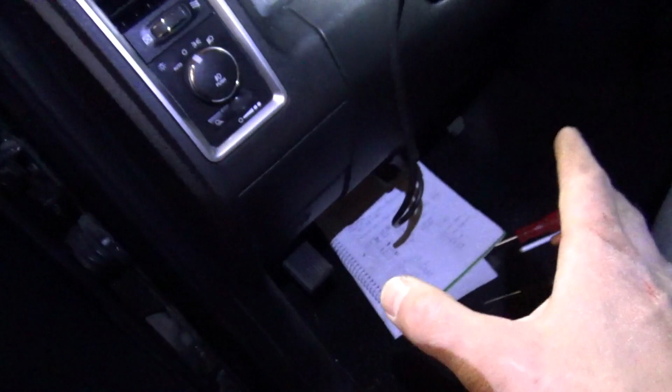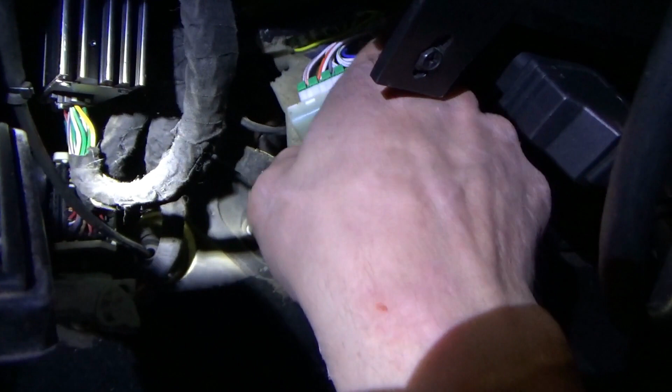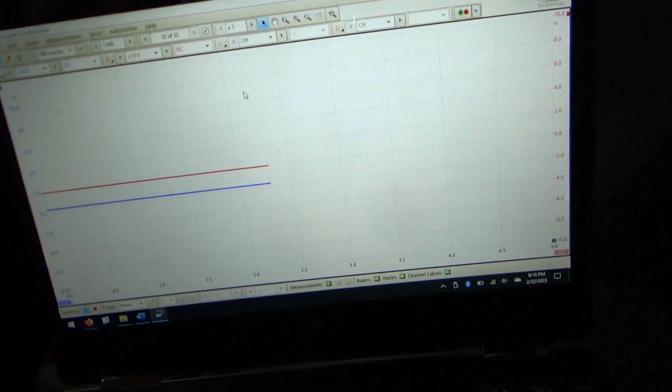Let's see what happens when we plug in that HVAC. I'm just curious. Wow. Everything's lit up. Cluster. 3.2 amps. Insane. HVAC just woke up the entire car.

Okay. Let's unplug it again. Make sure we're dealing with the right module here. Okay. Let's see if everything goes to sleep. Look at that. Everything just went to sleep. Cluster went to sleep. Let's see what the final draw is. Meanwhile, I'm going to look up which fuse feeds the HVAC. And we'll try disabling power instead of just disconnecting it from the network.

So this might take a few minutes, but again, the data logger logged everything. Look at that. Boop, boop, boop, boop, boop. And then right here is where I just woke it back up. That is super cool to have that log. Now it's 0.3. We'll see how fast it decays.

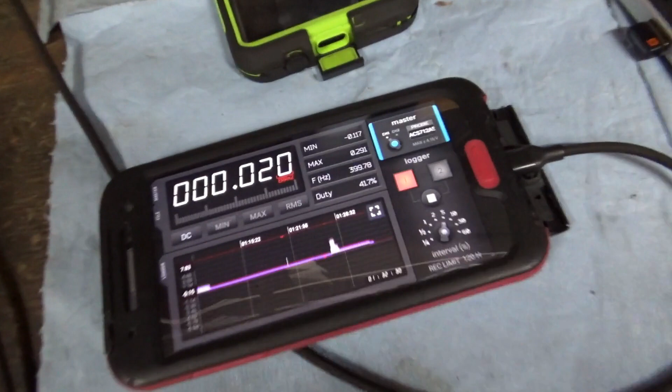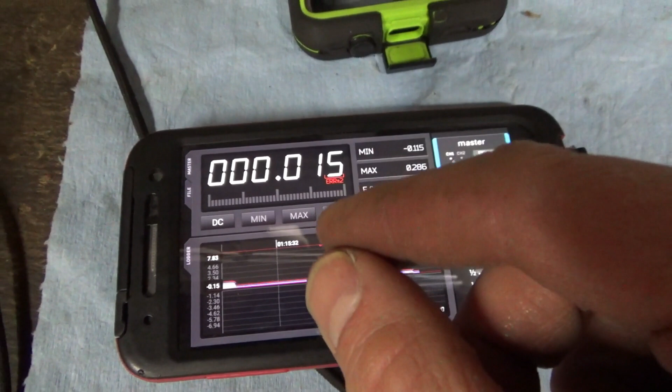Alright, here we are. Proof is in the pudding. We're back down to that 30 to 20 milliamps. That's the HVAC module drawing that and trying to wake up the network. But we have it disconnected at the star connector. So our draw is basically gone. Now, last step, I want to find the fuse, the constant battery fuse to the HVAC. Pull that out and see what the final draw is on this vehicle.

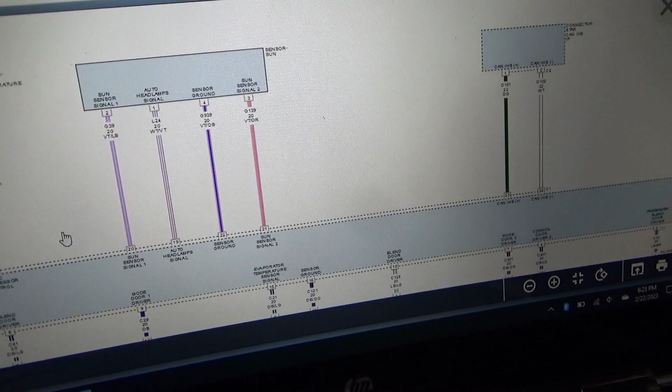Alright, here we go. Here's the wiring diagram for module AC heater. That's our automatic climate control. And sure enough, we have a constant battery fuse. Fuse 84, 15 amp, fused battery positive. Let's go there now to the power distribution center. Well, there's a 15 amp fuse, fuse 84, 0.2 millivolts. I'm going to pull it, see what happens.

Alright, here we go. Pulling that fuse. Let's see if the tea kettle sound went away. It is still there. And our draw is now 100 milliamps. So perhaps that's the wrong fuse. Let's do a little more research on the wiring diagrams.

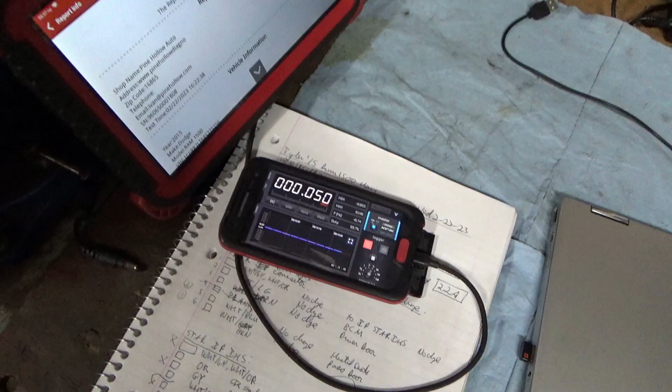One more thing to keep in mind is the breakout box actually draws 50 milliamps. I wish it didn't because it's so convenient to plug in. I wish the LEDs weren't there. Not helpful. That's why sometimes you just got to probe the wires instead of using a breakout box. So right now we have 50 milliamps with all the fuses in. I put the ICS fuse back in.

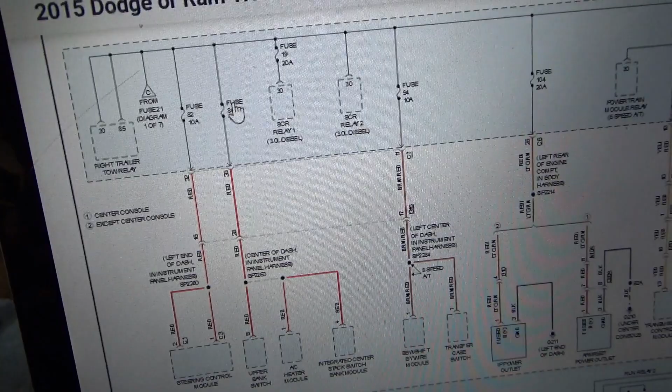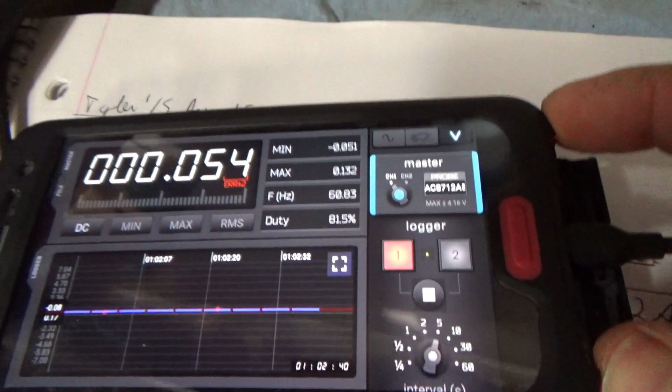Let's see what actually controls the HVAC module, because the wiring diagram was kind of misleading. Okay, so 50 milliamps. I expect one module is awake. That's going to be the HVAC. Now, the discrepancy in fuse 84, I looked up the redrawn diagram, and it feeds upper bank switch, AC heater module, and integrated center stack switch bank module. So let's measure the voltage drop on that fuse one more time. Look at our draw. Take the fuse out and see what the draw drops to.

You see it was 90 milliamps, 50 milliamps. Okay, that's a classic module doing its thing when it's not supposed to. So fuse 84. With the meter. Right there. Consistent 0.1 millivolts. I'm going to pull it out again. I'm going to see what happens to our draw. It's got to be the HVAC.

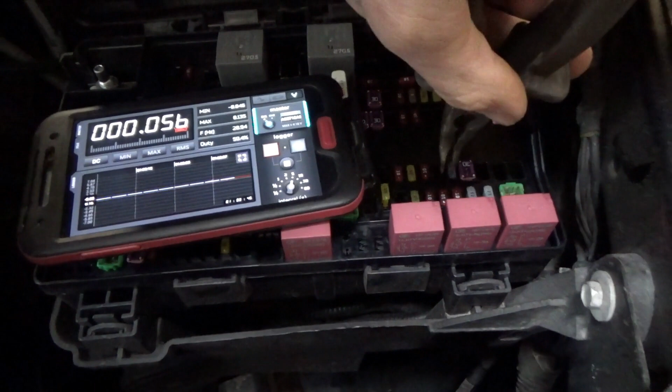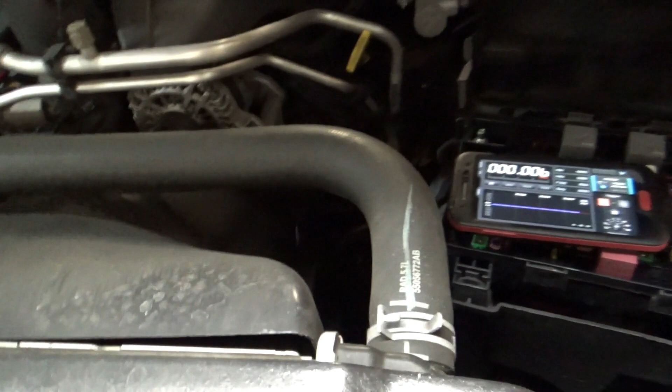Ready? There we go. 6 milliamps confirmed. HVAC module is staying awake. So for me, that's the end of the diagnosis. What do we do next? Look up a new HVAC module.

Now you might say maybe that sun load sensor or the recirc door might have something to do with it. Nope. Those codes actually might be set because the module's bad. And we check the door, you know, it moves. Why is it setting a code for that? I think the module is setting false codes here. It's not an input problem or an output problem, it's a module problem. So that's it. For part 2, maybe we'll do the repair, I assume they want the truck fixed because you don't want to drive around with no heat.

Another option is to make that fuse ignition powered instead of constant battery power. What do you need constant battery power at the HVAC module for? I don't know. Or the buttons in the center stack. It's not the radio, you don't need to remember presets. I guess it remembers your old temperature that you set, the automatic climate control. But this is no good. About 6 to 10 milliamps. I like that. And I think we're in good shape.

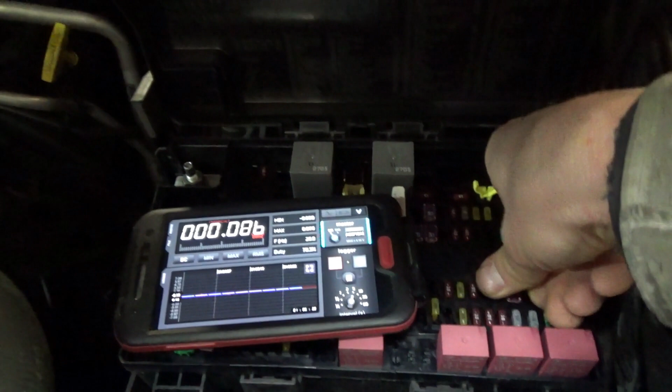Let's plug in this fuse one more time. And back to our 50 to 90 milliamps. You actually hear the blend doors moving around. You hear that movement?

Is it asleep? Shh. Okay.

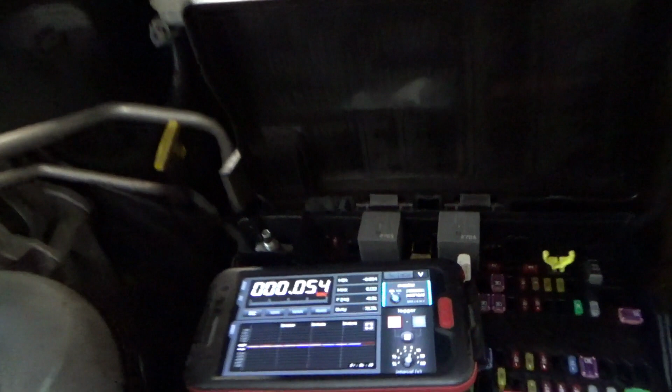So that was basically a power reset on that module. Now we're still at 50 milliamps. I'm sure it's going to go up to 90 and back to 50. And if we plug that into the network, it's going to wake everything up.

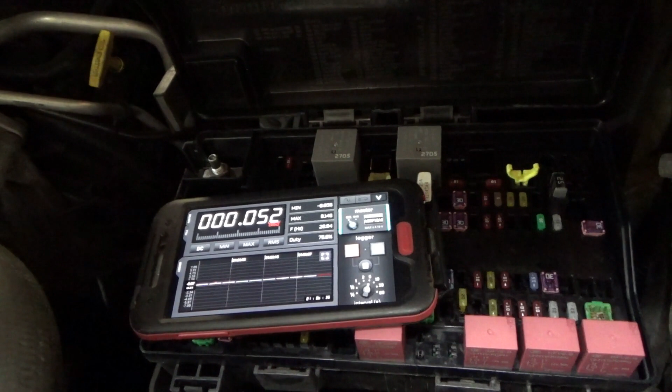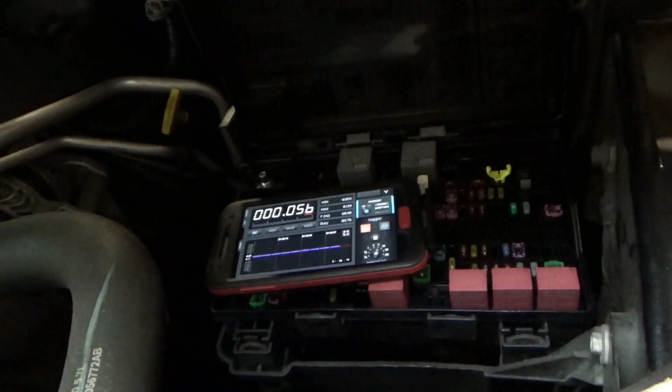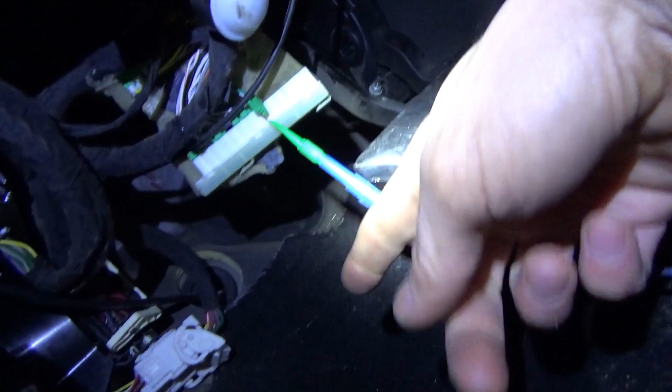We can even put a scope on the dark green wire before plugging it in and see if it's trying to talk. Alright, so last experiment. 50 milliamps. I hooked up the scope to just the dark green wire going to the HVAC. That's the communication wire. And sure enough, we see activity. Now keep in mind, this is not terminated.

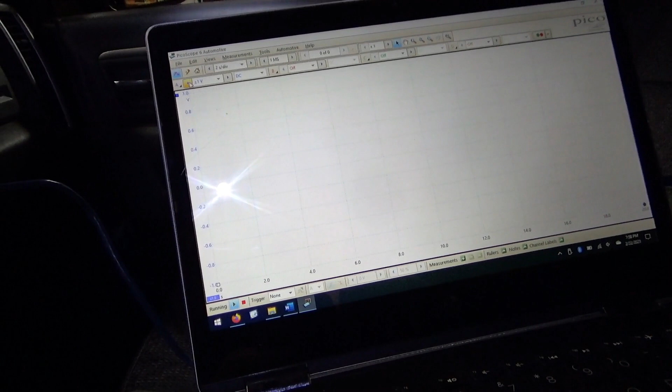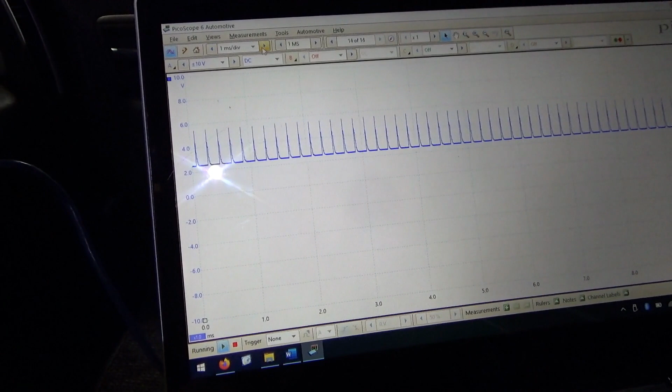So let's decrease the time scale. So that's what it's doing. Now let's pull the fuse and I'll let you guys see what happens. Alright, ready? Three, two, one. Pull the fuse. Boom. Off.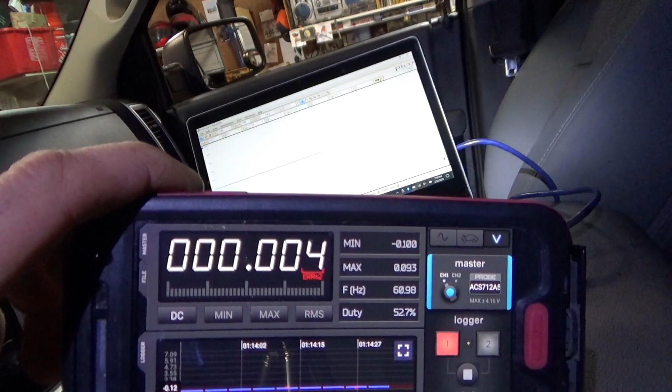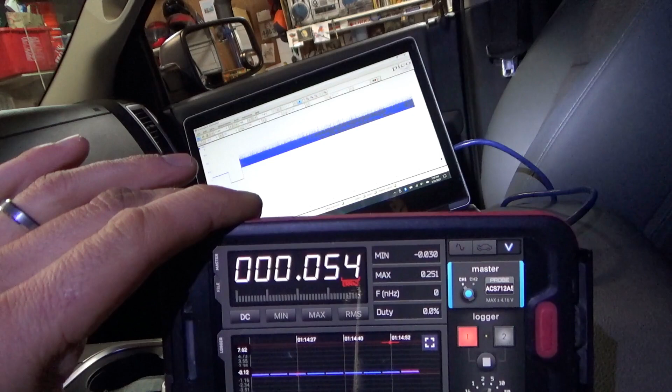Just another way to verify we're down to whatever, 5 milliamps like we were before. And put that fuse back in, it's going to come right back to life. And put it back in. There it is. Back to our, whatever, 50 to 90 milliamps, and then you can hear it go meet, meet, meet, meet. That's it. Needs one of these.

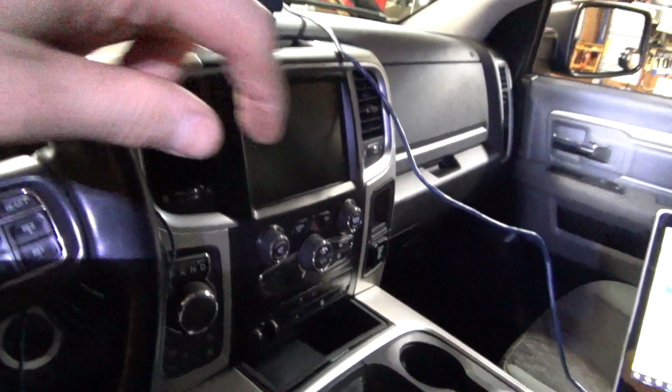Alright, so part 2. I talked to the owner of the '15 Ram 1500, and he said that's amazing that you found the problem and he wants it fixed the right way. So we're going to replace this auto climate control module. It's not too expensive, about 350 bucks at the dealer. Shouldn't take more than an hour to rip the dash apart, install it, clear the codes, make sure there's no draw. Truck should be fixed.

He noted that this truck has had 6 owners, and he bought it, and then he figured out why the last guy sold it. Probably because of this problem. So it's been going on for a while, it looks like, but now he's very excited that it'll finally be fixed. So the Ram 1500 with the parasitic draw, we're calling this climate control module. So I went ahead and ordered what I thought was the correct part.

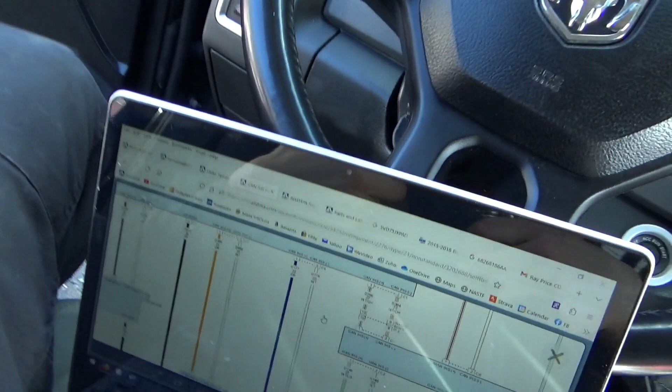And these things have so many modules and they're so integrated that, well, I'll show you the confusion here. So if you go into ALLDATA, parts and labor, controls, there's control module dash control unit with automatic temperature control with dual zone control, that's us. So this 5VD75JXPAD, 315 bucks. Again, go online, they say they're in stock, but they're not. You have to call, and call again.

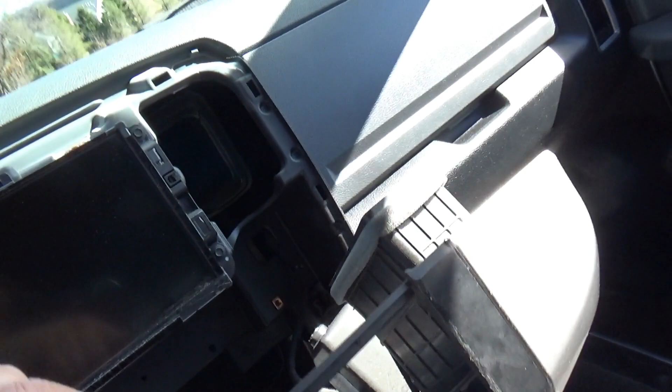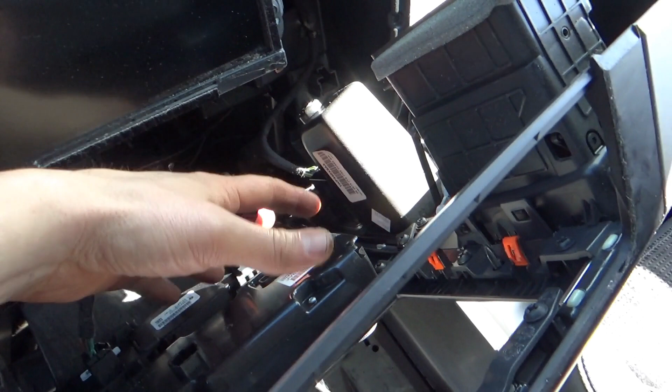There was a dealer about 2 hours from here who had one on the shelf. I'm like, all right, perfect. Let's place the order. I just gave him the part number, and then I'm like, you know what? Let me just tear the dash apart, make sure we're ordering the correct unit. So I tear the dash apart, and this unit right here with all the buttons on it, you would think that's the climate control module. You would be mistaken. This is just a module with buttons.

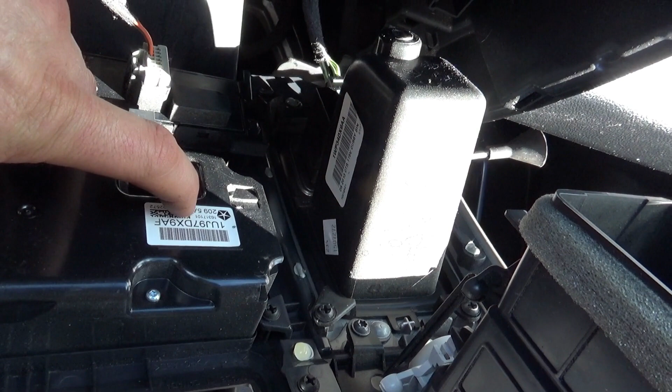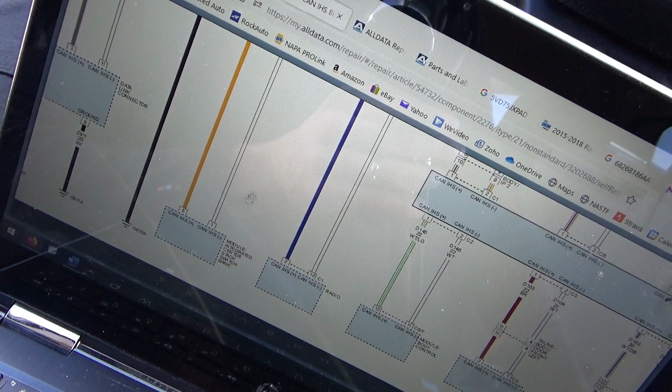So I'm looking for the dark green communication wire, and I'm not seeing it on the only connector that's coming to this module. I do see an orange and a white, and the part number, you see that 1U97DX9AF? Well, that doesn't match up with anything. Which module is that? Well, according to our wiring diagram on the CAN IHS bus, this would be the module integrated center stack switch bank. Aha! So that's the orange and white wires. We're going after module AC heater that has the dark green and white communication wires.

So this center stack module, I ordered completely the wrong part. I called the guy back. I'm like, hey, wait a minute. Here's the VIN. Which module do I actually need? He gave me the part number that matches the center stack. I'm like, okay, that's not the one I need. I need the one that controls the blend doors and all the other HVAC stuff.

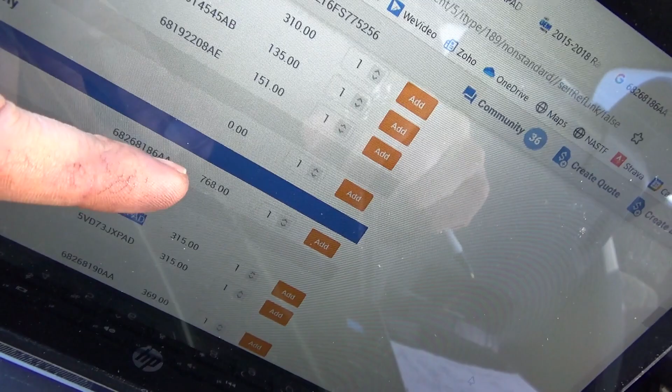That module is also maybe a week out, maybe easier to get, but it costs like 3 times as much as the center stack. You can see right there, this one's over 300 bucks. This one's almost $800. He said, yeah, 820 bucks with tax and everything. I'm like, oh my gosh. So to fix your battery draw, you need to pay almost $1,000 just for a stupid module.

Like, how can they charge this much for a little box with some electronics in it? And new cars are full of boxes with electronics in them. And a lot of them are in back order, discontinued. I don't know. Sometimes it kind of gets frustrating trying to chase these parts down. People just want their car to work, obviously. But you almost feel like you're ripping the customer off. I know you didn't make it, you didn't build it, you didn't buy it. But it's honestly getting concerning. Let's put it that way.

So I'm going to call the customer back. I already quoted him on the $300 module. Now I'm going to have to make another phone call and be like, hey, there was some confusion. That's the wrong module. You need this one. And it costs 3 times as much.

So maybe the customer will take my advice and go for the Russian bypass hack, where instead of constant battery power, we'll feed it ignition power, and you'll just have to dial in your temperature every time you start the truck. I mean, up till now, he had a dead battery every time, so he had to do that anyway. So it'll be an improvement. We'll fix his draw and at least fix that problem.

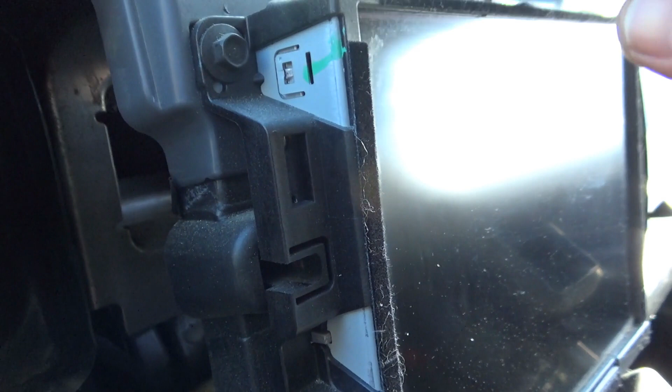So I still have to find where this AC module lives. Unplug that. And we still have this little boiling tea kettle sound, and that's coming from this fancy screen. A little capacitor in there or something. That's not causing a draw, not that we saw. But it's a little concerning.

It's a pickup truck. It's supposed to be a work truck, for crying out loud. So we'll be back and get the right module, or if the customer says, just go ahead and do the rewiring.

Alright, so I talked to the customer, told him, man, this little module is going to be pricey. And he's like, you know what, do your bypass wiring, so we'll just feed that module ignition power instead of the fused battery power. Just like we did on that Toyota Avalon that wasn't going to sleep in the information center in the cluster there. So that's kind of a workaround,

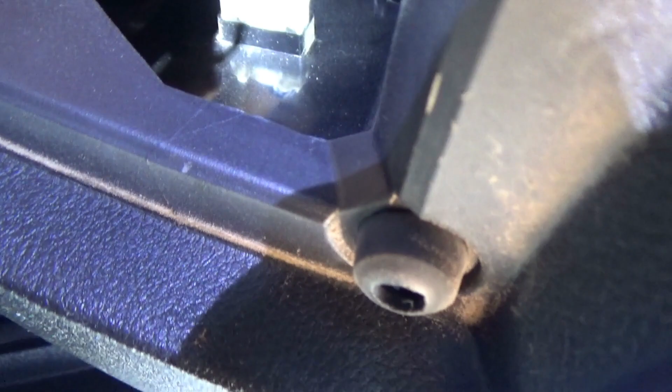but that's what I would do on my own car, because I would refuse to pay almost $1,000 plus diagnostics and labor and all that crap just to get rid of a draw. It's kind of sad. So we'll do that. We'll just need to find a fused ignition power source in that fuse box, and on that ATC fuse 84, we'll feed that ignition power instead of battery power. So that's it.

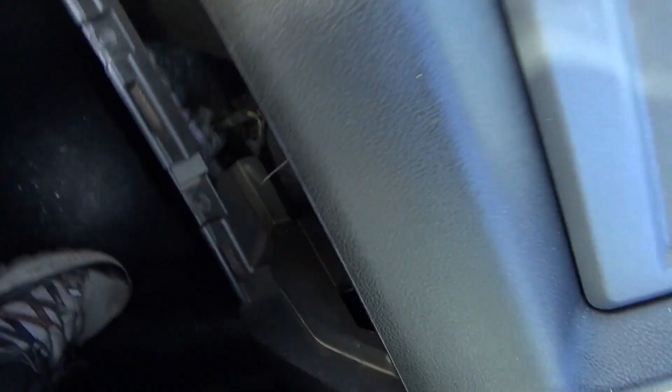Alright, I finally found what we're looking for. This right here, one connector, little plastic box that costs $900, is the HVAC module. So that's the white and the light green wires right there. And the truck is not going to sleep. You can see the cluster, the needles are lit up. That's a good indicator that the truck is not going to sleep.

So right now, everything's plugged in. The comm, the fuse, everything's as is. Let's just unplug this and see if the cluster goes to sleep instantly. And boom. See how the needles drop? There you go. Shut off.

We plug the module back in. We do that with this hand. You'll watch the cluster wake up. There it is, lit up. Talking, talking, talking. Hear the blend door. Let me unplug it again. Cluster will go to sleep. Only takes a few seconds. Right there. Shut off.

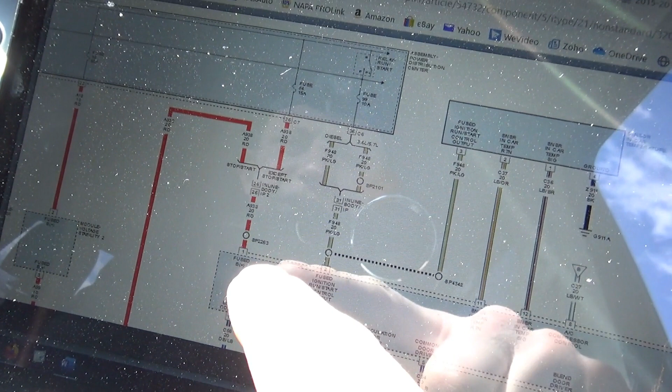Okay, so if we do the bypass on that fuse, it also feeds battery power to the center stack. So if you want to have your key in accessory and listen to the radio and use those knobs, that's not going to work, unfortunately. So what I have to do here, and the wiring is fairly accessible behind the glove box, is to look at the wiring diagram for the HVAC controller.

And here we have two power feeds. So we have fused battery power, and then 10 amp fused ignition run start control output. So can we tie both of these together so we don't have to mess with this fuse, because that's going to affect the center stack too. There's more than one thing on this fuse 84. Now this is 10 amp, this is 15 amp.

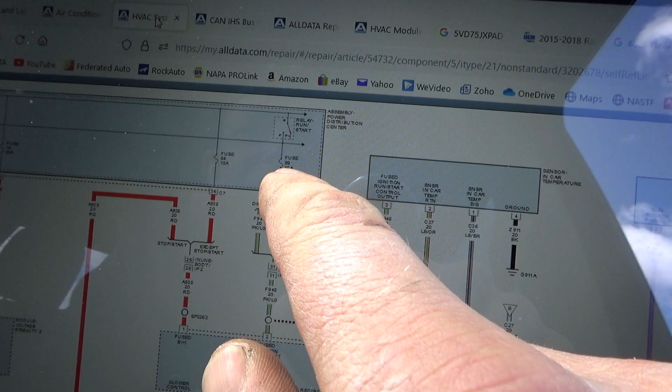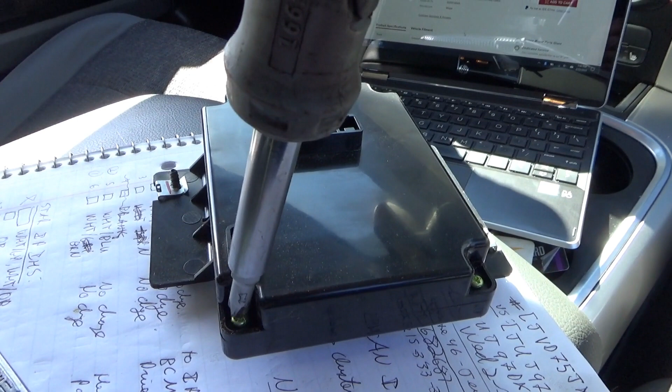I'm thinking if we just basically cut the wire here, the red one, and splice it to pin 2, the ignition power, then maybe upgrade this fuse to a 15 amp just so it can carry the loads of both circuits, and we'll hack it that way. I think that should work.

So here's our magic box. There's the original part number. It was superseded. Can someone tell me how this stupid little thing, it's light, there's nothing in it, costs over 800 bucks? It blows my mind. Let me take these screws out so we'll see what's inside. Like I said, there's not much to it. Just a few chips, resistors.

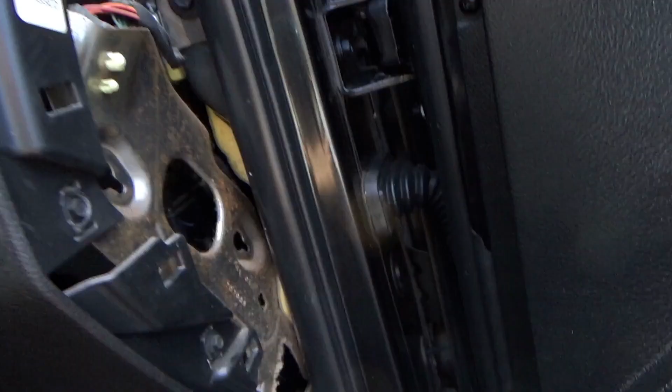How does this cost at the dealer over 800 bucks? It just blows my mind. It's criminal. It's what it is. These people, they know people can't live without their air conditioning and, you know, have a battery draw. So is this planned obsolescence or planned extortion of money?

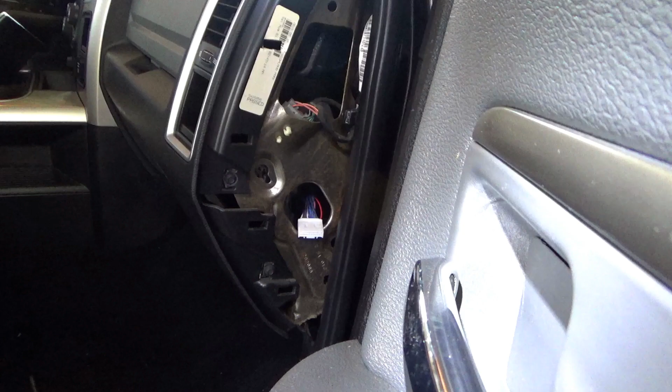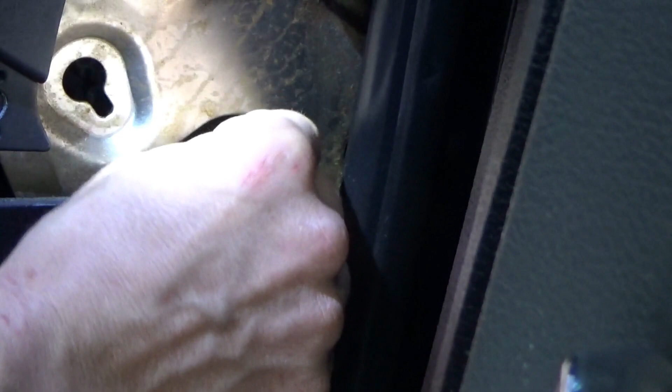I don't see any green crusties or burn marks or anything. This thing's just like a chip failed and it just keeps talking and drawing and staying on. Wow. So at this connector, you see the red wire and the pink and green. Well, I just want to cut the red wire and splice it into the pink and green, then we'll have ignition power to everything on this module. And we'll see if it works.

Alright, here's what we're going to do. There's the connector. Fuse for the red wire is out, fuse 84. So I'm going to cut it right here and leave some length, because we're going to have to splice it into the neighboring wire. So that wire is cut,

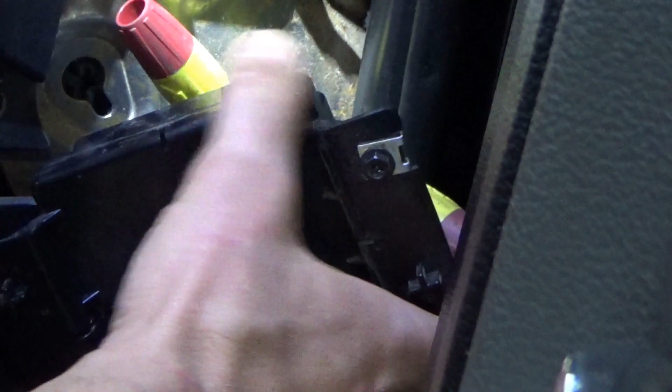and now as a temporary bypass, I just want to use a piercing probe to go from here to here, so we'll feed ignition power to the module side of the red wire. That should be pretty easy to do. And we'll just make sure everything works before we do the final splice. So we'll go from here to here.

Make sure not to slam the door. Okay. Now we'll just use a jumper. Now remember, this is fused, so making a jumper in this location is perfectly fine. You're still safe. So we'll go from there to there. Let's turn the key on. So everything's still asleep. Let me put in that fuse. This one right here.

Our cluster is awake now. You just saw it's going to go to sleep. Boom. Okay, so now the only module that's not connected to the fuse is right here. Now let's see, turn to accessory, our radio should still work.

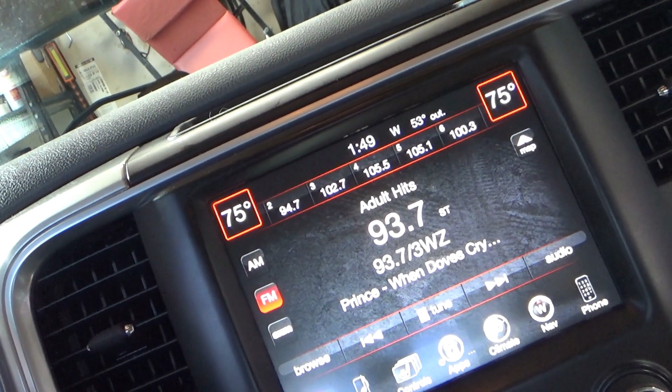Why is this not working? Let's go to ignition. Why is our radio not working? Media. Connect to Bluetooth. See, radio. Okay, now if we turn it to accessory. Okay, great. So that still works. Our tuner still works.

Now let's see, HVAC. So I guess the module is offline, so it defaults into whatever. Turn the ignition on. So let's see, 75 degrees. Let's say we turn the truck off when it's at 82 degrees. We don't want the front HVAC. Let's just set it, fan speed 2, 82 degrees. Let's see, climate controls. Oh, there's climate right there. We'll do face and feet.

So that right there is what I have it set to. Now if I turn the key off, that module is going to go offline. Okay, climate off, module's offline. Okay, turn the key back on. Module should wake up. It starts off at 75. And the temperature got reset to 75 degrees. Okay, you know what? That's not a big deal at all, as long as the truck goes to sleep.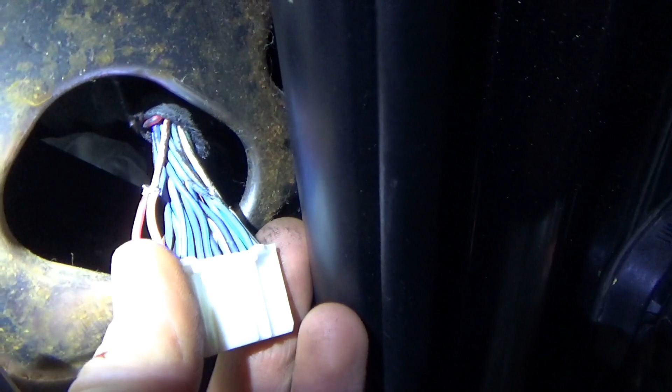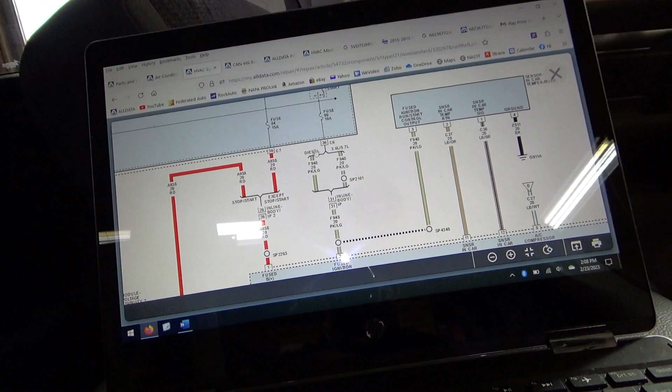Look at that cluster. I guess we could open the door, close the door. Don't want to close that door, it'll crush the module. There you go, it went to sleep. So I think that's a perfect solution to this truck to avoid paying hundreds and hundreds of unnecessary dollars. I think the customer will be very pleased, so we're going to do that. Just solder those two wires together, and this truck's done.

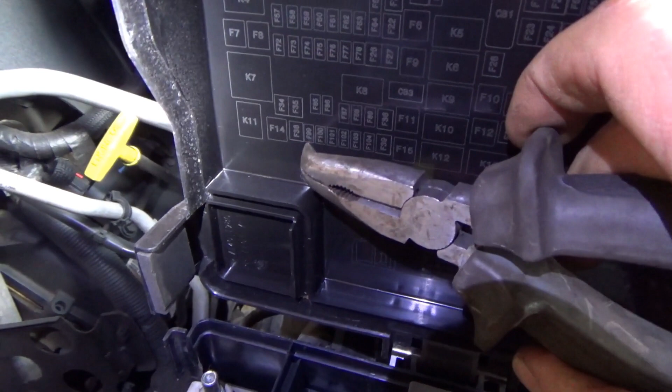So guys, that right there is a $900 soldering hack. Very proud of that. Screw the dealer, screw the parts manufacturer, whoever jacks up the prices. We're just going to wrap this up in tape. Truck's going to be fixed, no more draw, HVAC works fine.

So now, what I want to do is just swap these fuses around, since this one's going to be carrying a little more load instead of this one. So 15 amp 84 and 10 amp 99. Let's just swap those around. So here's fuse 99. There's fuse 84, 10 amp, 15 amp. Pull this guy out.

The owner said he just replaced a fuse box because it was corroded. On a 2015. It's not even in upstate New York. Put that in here. And I guess we can note that on the diagram so whoever's in here next time will be like, hey, why is that a 10 and why is that a 15? Well, that's because.

Alright, final verification of repair. So default, climate off. If you turn the fan one click, you see default says 72 degrees and it says front defrost. Push that, it'll go to foot. I think that's pretty much perfect. That's the only thing that was affected. It was the memory function of your previous climate control setting. First world problem, right? No more draw.

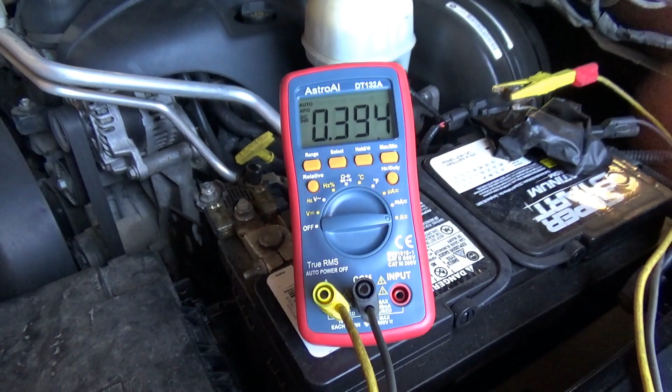This truck is ready. So the customer was very excited that I could do that little wiring hack there. Totally on board. I would do the exact same thing for any module that doesn't fall asleep, that's an option. Sometimes it causes a minor inconvenience, but changing the constant battery power to an accessory or ignition power, as long as it's done right, is a viable solution, because these modules, A, are stupidly expensive, and B, are usually on back order. So that is what it is.

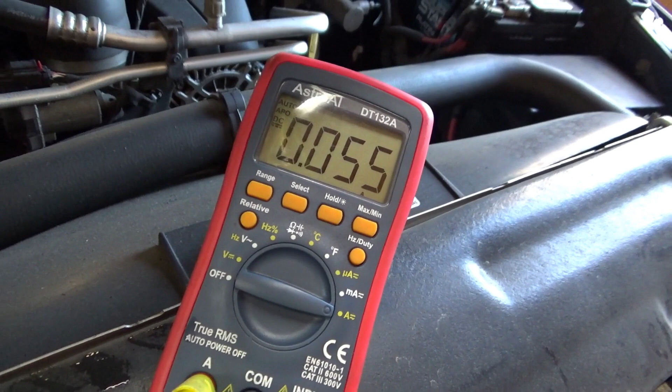All right, a little bonus footage. Some people might say, Ivan, you didn't verify the repair. What's the draw now? Keys out, I got my ammeter connected. We have 394 milliamps, so the truck just got shut off, and we're at about 240 on the clock. So let's see what this draw goes down to in 10 minutes, 15 minutes. I expect less than 10 milliamps.

Alright, in less than 5 minutes we're down to 55 milliamps. That's good. I want to see deep sleep, less than 10. Alright, it's been about 10 minutes. 12 milliamps. Sweet. Confirmed. Fixed. Customer can pick it up.